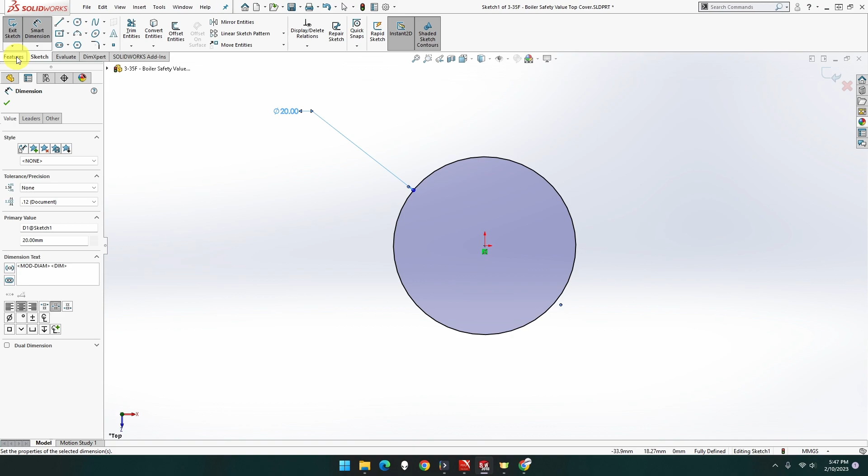Alright, so let's click on Home, Advanced, MMGS. Alright, so let's go top, sketch, circle. That's going to be a diameter of 20. 20, beautiful. Got a height of 19. That can stay as mid-plane, that's fine.

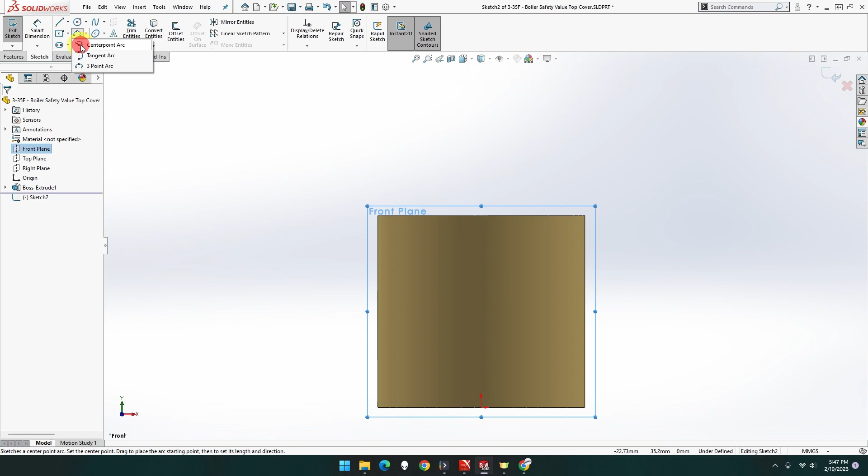Now we're going to go to, nope, front plane, thank you. Normal and sketch. We're going to go to center point arc. Click once there, and once there, beautiful. So we just want like a quarter circle. So now line from there to there to there. And that should be a radius of 10. It is. Beautiful. Leave that there locked in.

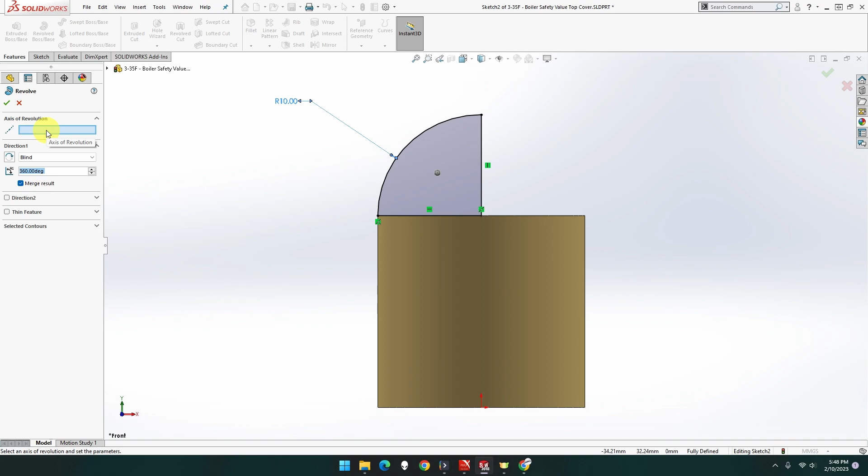Beautiful. Now we want to go to feature, revolve base boss. Axis revolution. Yeah, it's already found that. Sorry, I'm expecting something else for some reason. And done. Look at that. That's that part done.

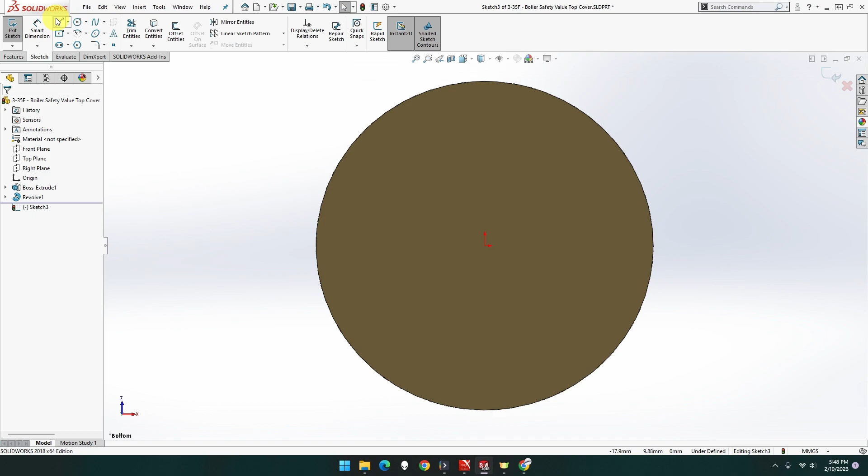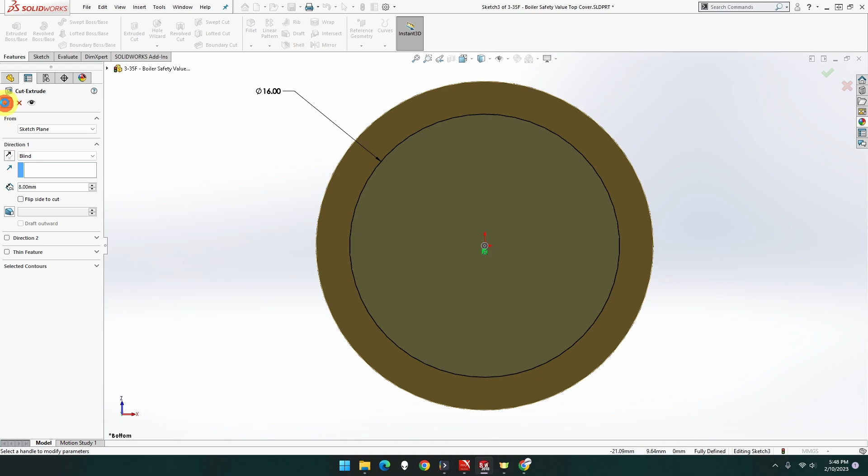Now we want to go here, go to normal to, sketch, one circle. That's going to be 16. So we got smart dimension. Thank you. 16. That's going to be extruded. Oh, sorry, not that one. Extrude cut. That's going to go in 8mm. Done.

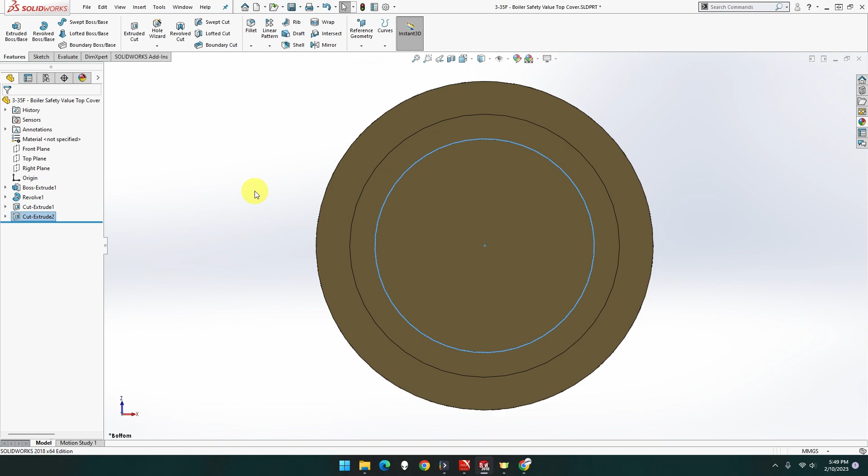Now we want to go to sketch again. That one there, the one we just extruded. It's going to be another circle. That's going to be 13mm. So that's the smart dimension. 13. Feature. Extrude cut. That's going to be 11. And done. So you should have something like that.

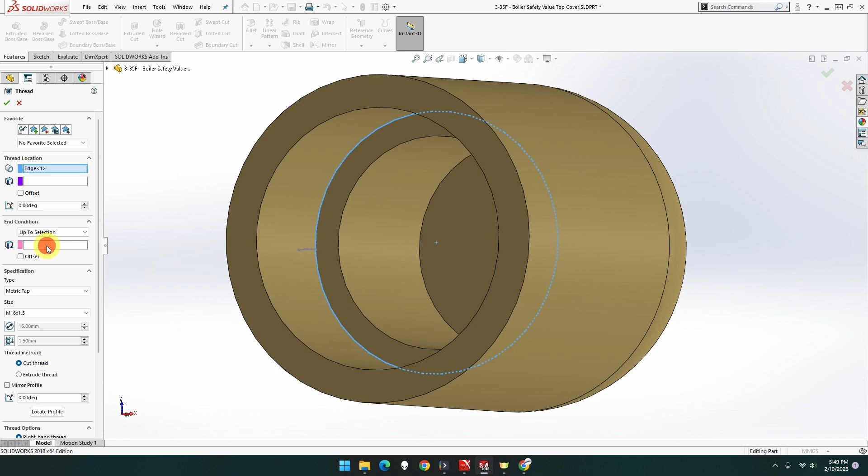Now we want one more thing, which is the thread. So hole wizard, thread. We want 16mm. 16 and 1.5. Gonna start there, end there. Oh, sorry. Start there, but it doesn't change over automatically, which is kind of annoying. Maybe a reason why. And end there.

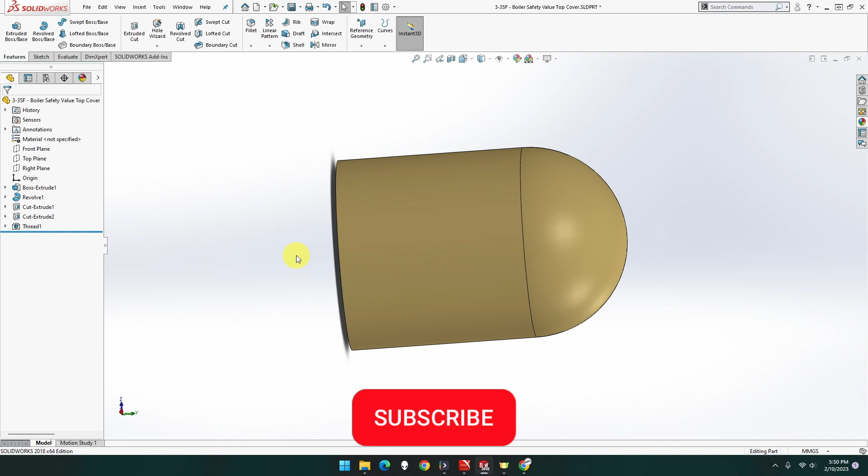We got trim and trim. It's gonna be cut thread, yes. Got it right that time. Yay! I'm gonna click the wrong one. So that should be it. Double check. Height 29, yep, rate is 10. That is looking good.

Alright, that's part 3-35F, the boiler safety valve top cover done for the Clayton Undertype steam wagon.